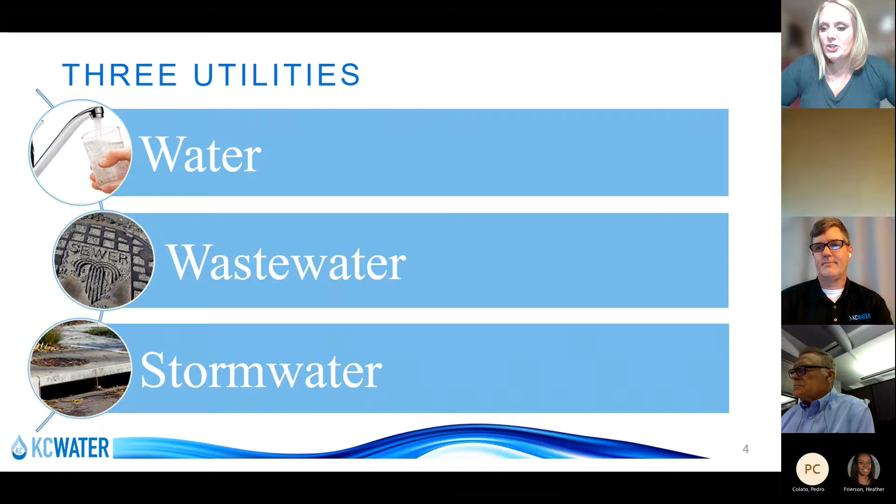So to kick us off, I'm going to turn it over to Jeff, and he's going to give us a quick summary on KC Water as a utility provider.

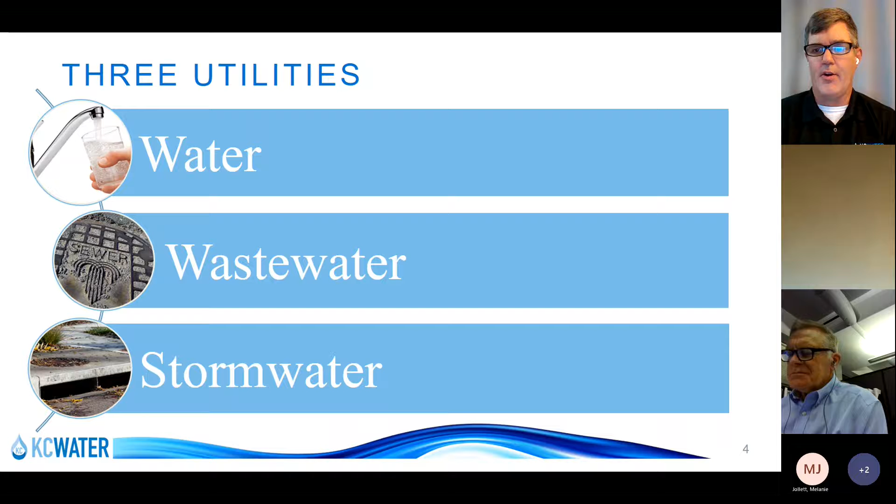Thanks, Melanie, and thanks for joining us tonight, Tom, and anyone who watches this recorded later, appreciate it. I always like to take a little time to remind everyone that here in KCMO, KC Water is actually 3 utilities. We're your water utility provider, wastewater utility provider, and your stormwater utility provider. Most people realize the water and wastewater portion, but the stormwater can be overlooked sometimes.

Next slide. So to serve all 3 of those purposes, we have a large number of assets all throughout the city. We have 1 water treatment plant that treats and supplies all the water for our residents and customers here in KCMO, about 18 pump stations to move that water around, and 2,800 miles of pipes to move the water to all the places it needs to go.

On the wastewater side, we have 6 wastewater treatment plants that treat all the sewage that flows to them through about 2,800 miles of sewer pipes as well. We have 3 treatment plants along the Missouri River, and another 3 along the northern city limits, where the flow breaks and flows north rather than south. On the stormwater side, we have another 630 miles of storm sewer pipe in the ground, and about 13.5 miles of levees throughout the city.

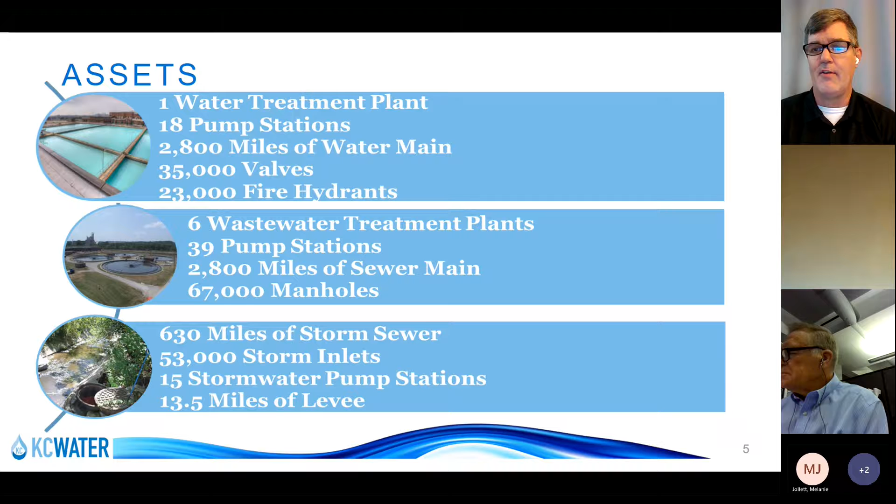A lot of people don't realize the number of levees that we have. These are along the Missouri River and the Blue River and some of the other rivers throughout the city to help protect those areas from flooding. All 3 of these utilities tie together through the Missouri River. All water that falls around here eventually flows to the Missouri River, and that's where we draw a large portion of our drinking water that we treat as well. So it's really a vital asset for the region, something we want to continue to maintain, keep clean, and keep usable for everyone going into the future.

With that, I'll turn it back over to Melanie to talk about the water main replacement program.

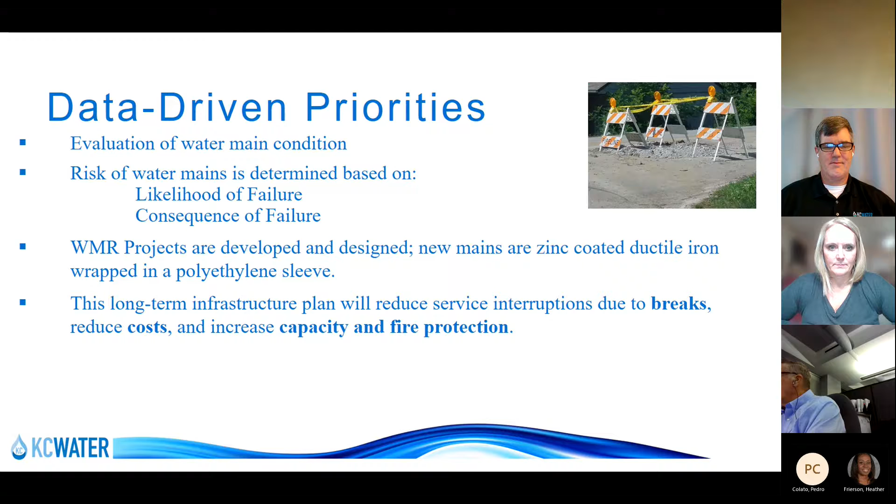All right, thanks Jeff. Next slide please, Jerry. It says I can give control to you, Melanie, can you advance it? Something happened here, I don't know. That was weird. Can you advance it now? Hold on. You might need to unshare and then reshare, Jerry, it might give you back control. Can you see any slides at all yet? We still see the same slide. Did you try stop sharing, Jerry? It may have popped up on your laptop too, check that screen. There you go, you've unshared now. Can you see that now? Go back into presentation mode and I'll jump to the correct slide. Go back about 3 slides probably. There you go, right there. Okay, perfect, thanks Jerry.

All right, thanks Jeff for the overview of the utility services that we provide. I'm going to give a quick update or just background on our water main replacement program.

So we're here to talk about a water main replacement project, and just a little history on the program that funds these projects. KC Water's distribution system includes about 2,800 miles of water mains, so we have a pretty large system, and a lot of our mains date back to the 1800s. So we do have some aging infrastructure within our distribution system. This isn't a challenge unique to KC Water, it's a nationwide challenge many utilities face. What is unique to KC Water is we implemented a water main replacement program about 8 years ago, with a goal to replace about 1% of our infrastructure every year. This equates to about 28 miles every year that we try to replace within our distribution system. As I mentioned, we're in our 8th year, and to date we've replaced more than 200 miles within this program, so we're seeing some really good successes with it.

Next slide, Jerry. Okay, do you have control? No. Try hitting the down arrow and see if it advances the slide for you. Page down and down arrow didn't work.

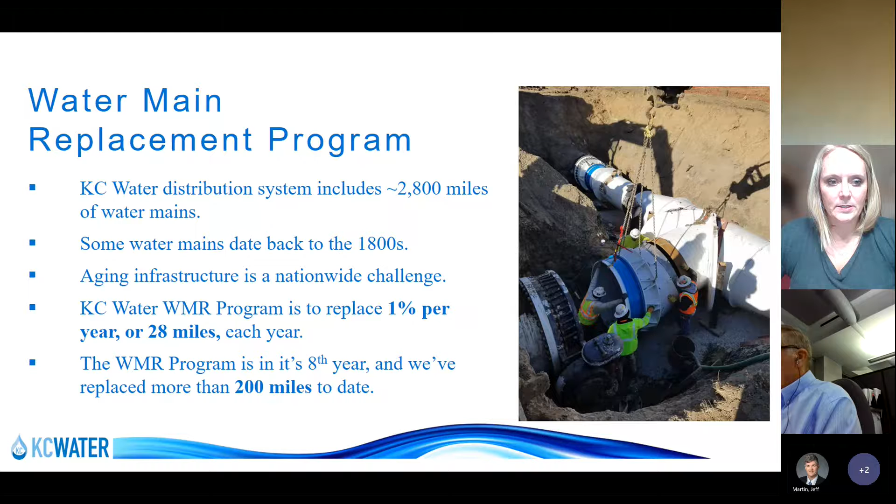Can you go to the next slide? There, yep, there we go.

All right, thanks Jerry. So how do we identify these 28 miles, which segments are going to be included in the 28 miles we replace every year? What we've done is we have a pretty robust, data-driven evaluation of our water main distribution system. We have a pretty hefty asset management data set with a lot of information on our distribution system, including material, the age the pipe was installed, and the number of breaks on the pipe. We've gathered all of this data and created likelihood and consequence of failure criteria, looking at the likelihood and consequence of failure of each segment within our distribution system. From there, we calculate a risk score for each segment. We then look at the top 28 riskiest pipe segments within the system and develop projects each year. These projects are designed and then lead into construction in the subsequent year, after design is complete, for the highest risk mains within our system.

Each of our water main projects designs replacement pipes, and we design the new infrastructure to be zinc-coated ductile iron pipe, wrapped in a polyethylene sleeve. This gives the new water mains about a 100-year design life.

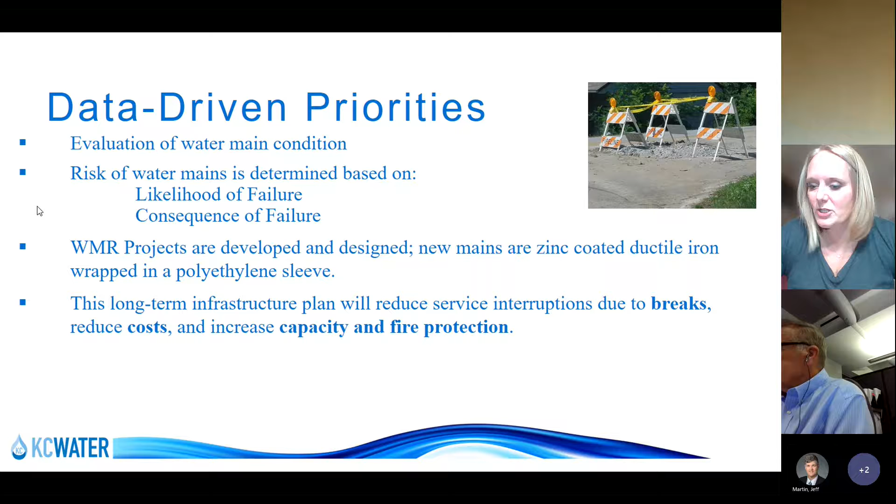Next slide. And with that, I'm going to turn it over to Jerry, our project manager, and he's going to give specifics of the project that we're talking about tonight.

Okay, this project includes approximately just under 8,000 feet of replacement water main that we're replacing. That's 6-inch, some 8-inch and 12-inch cast iron pipe.

Something happened there again? No, we're still good. We can still see fine. Okay.

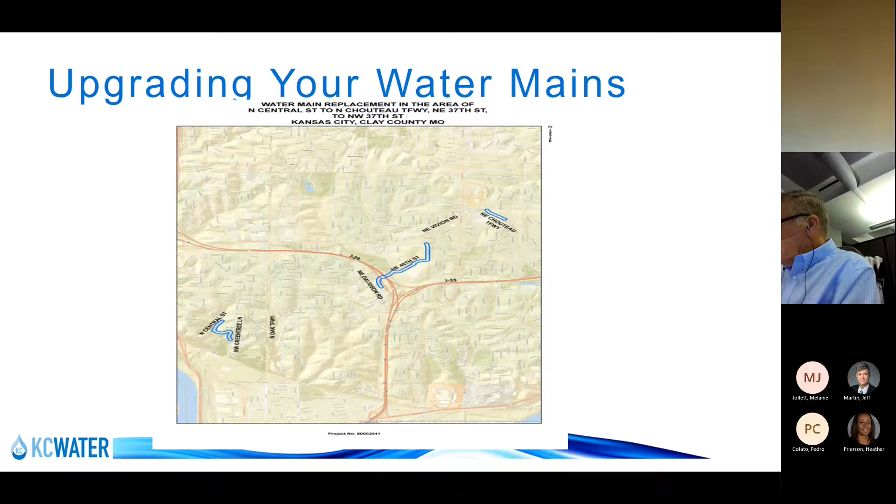And this is in the area, 3 separate segments, basically areas that we're working in: North Central to North Chouteau Traffic Way, and from Northeast 37th Street to Northeast Vivion Road.

And the specific streets are there's 1,070 feet of 12-inch water main that we're replacing. These are all cast iron water mains.

We're replacing them with ductile, which is a much better material than the cast iron, lasts longer, and it's proven to be much stronger and very long lasting, plus the fact that we wrap it with poly wrap, and that is to reduce the amount of corrosion, kind of prohibit the corrosion environment that exists sometimes around pipes. And so that is really a good thing as well.

Plus there is a zinc coating that is installed on the water mains, and again, that helps with the corrosion environment. In addition to the one on Northeast Chouteau, we are replacing...

1,625 feet of 12-inch along Northeast Davidson from Northeast 42nd to Northeast 46th Street. We're also replacing 1,800 feet of 12-inch along Northeast 46th from Northeast Davidson to North Brooklyn Avenue. And we're replacing 1,245 feet of 6-inch water main.

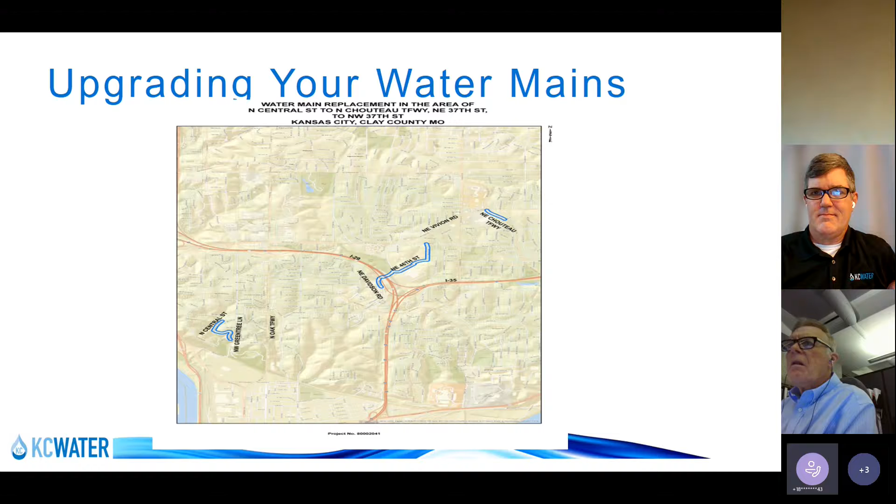Okay, Jerry, I'm going to take control. I'm going to share my screen. Okay. Can you see that? We can, yes. Okay, perfect. All right, go ahead, Jerry.

So this is what happens on your block screen. Is that the one you got there, Melanie? I'm not sure if I'm seeing yours, but anyway.

When we start working on your block, we'll have to first mark the utilities, and the contractor will do what we call potholing to verify locations and elevations of the water mains and other utilities in the area, to make sure he has a clear path to work in. So he'll be doing that investigation.

A traffic control plan will be implemented. Every contractor has to have an approved traffic control plan for how traffic is going to be open, and there should be access to everybody's house at all times, except if they might be excavating in front of the driveway. The contractor will contact residents, showing and alerting them to when he's going to be coming down their street.

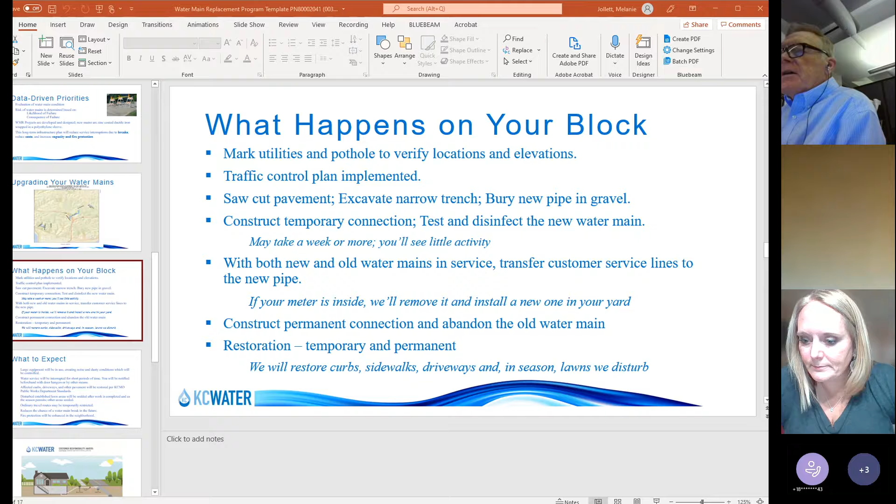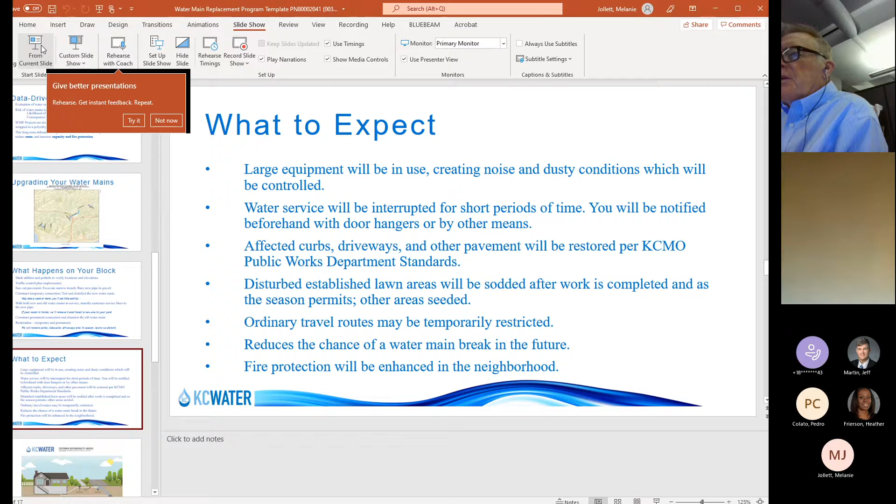And some other things you can expect: there'll be large equipment in use during that time, creating some noise and dusty conditions in dry times. Those will be controlled, and the contractor is required to control those dusty conditions.

He will be working, not late hours or anything like that, so it's going to be not interrupting the residents as least as possible. Like Melanie said, there'll be short times of interrupted water service, and you'll be notified ahead of time with door hangers or other means, so be looking for those on your doors, or somebody might be knocking to give you notice that the water will be shut off at a certain point in time.

Some of the things that will be affected are curbs, driveways, and other pavement, and that'll be restored by KC-Mo Public Works standards. We abide by all their standards for street pavement, driveways and sidewalks, so they will be restored to hopefully better than previous conditions. The disturbed established lawn areas will be sodded after work is completed, and as the season permits, other areas seeded. So we will try to restore the lawns as best we can.

Ordinary travel routes will be temporarily restricted. There'll be travel permits that the contractor has to get to keep the traffic moving. Normally he has at least 1 or 2 lanes open, depending on the street, and maybe some flagmen or guys with signs that will be helping with the traffic.

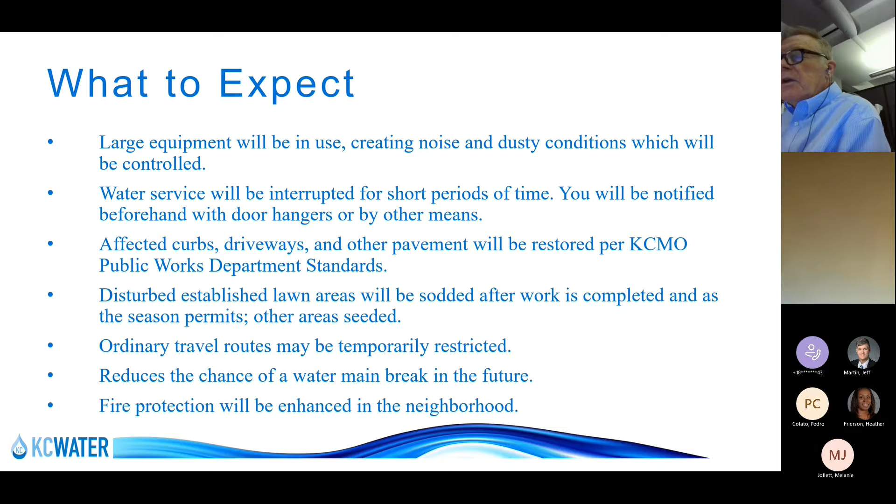This reduces the chance of a water main break in the future. This will be a new water main, updated to the best possible material that we can use for the water main. And then the fire protection will be enhanced in the neighborhood, especially if you go from a smaller main to a larger main. And like Melanie said, these will be new water mains with no tuberculation inside, so the fire protection will be increased and enhanced in the neighborhood as well.

Okay, did you go to the next one? I did. Can you not see that? Well, I'm kind of doing my own here. The one that shows the house.

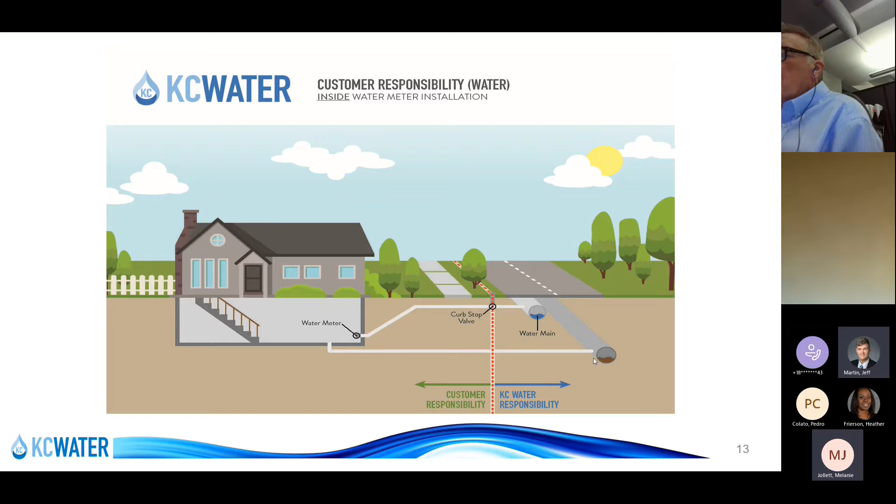Okay, I think let's just jump to the schedule and we'll close it out. So here we go. Can you see that, Jerry? Project sequencing and duration. Yeah.

The duration will be about 8 months or so, and depending on weather and so on, we have 3 separate locations that'll be starting at the end of December sometime, and working possibly through August, again depending on the contractor's schedule and weather and those types of things. But we'll try to get the project done and expedite it as best we can.

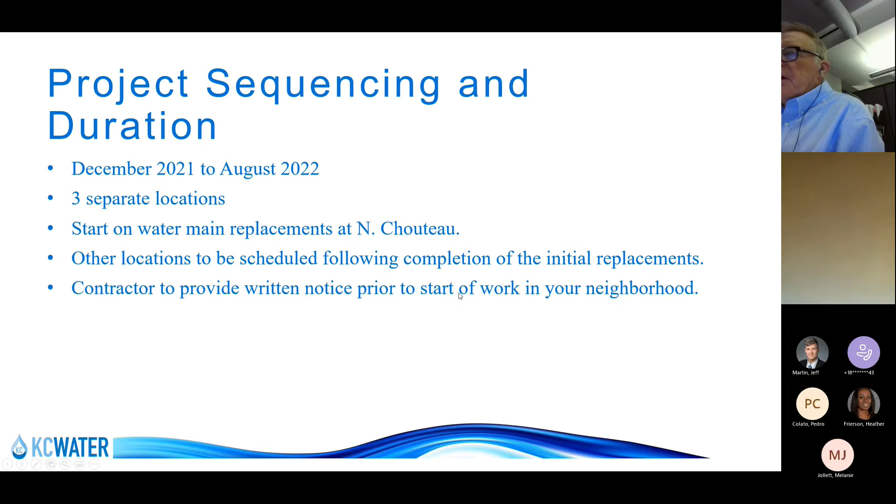They will start on the water main replacements on North Chouteau, and then move to the other 2 locations depending on their staffing, their crews, the equipment, and which one they think they could go to next. So as I understand, they're going to start with North Chouteau. Other locations will be scheduled following completion of the initial replacements, and they will be notifying people ahead of time prior to the time they get there. So just be looking out for the contractor to provide some written notice before he starts work in your neighborhood, so he'll be able to tell you when he's going to be there.

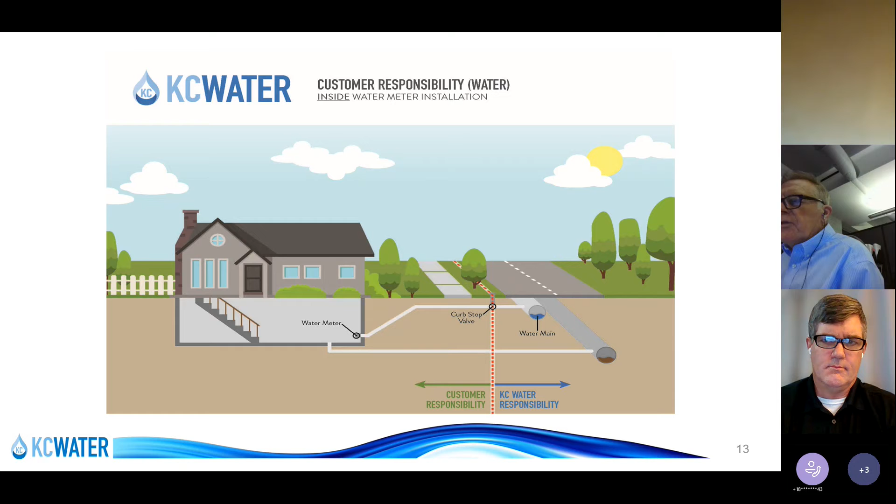No, this one will be out in the street. Some old mains might have gone that way, but all new mains are being done under the pavement. It depends on where the other utilities are for the most part, where we can put it in. We do have other water mains that exist in the area, and there's getting to be a lot of utilities in the street right of way. So most are put in out in the street pavement, but sometimes we go under the sidewalk if that's the only place we can go, or try to find the best place so we don't have to put a lot of bends and connections in our water main to get around all the utilities. Certainly, that makes sense.

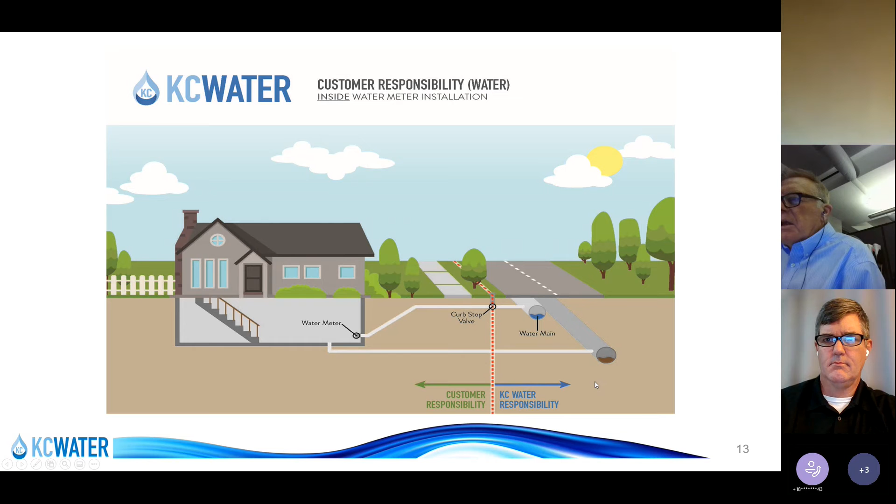The contractor will also be digging ahead of where he's installing the water main to make sure he knows where the utilities actually are. Even though he gets locates, he'll be actually digging them up ahead of where he's putting the water main in, so he can plan accordingly and make sure he's clear of the other utilities. Right, because the maps aren't always 100% correct from the other utilities, I know that happens.

Okay, any other questions? No, sir. Jeff, do you see any other questions in the chat? I'm not able to see the chat right now. Nope, don't have anything from the chat, so I think we're probably good for the group.